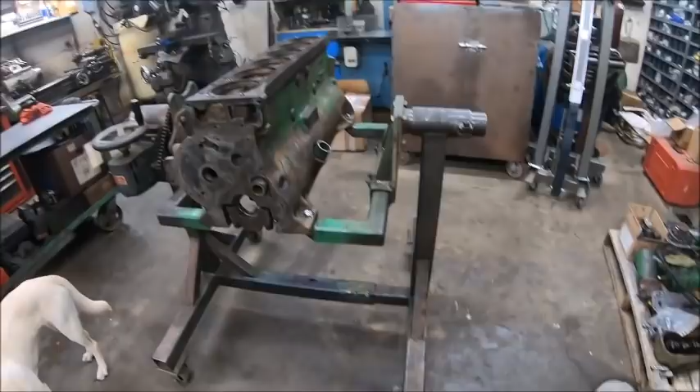Okay, so I spent pretty much all of yesterday cleaning parts and scraping gaskets, and I finished stripping the block down, got the locator studs out of the head deck, scraped all the gaskets off the side of it. I got all the plugs out of the ports except for that guy. I might have to drill that one. He doesn't want to move, or I'm gonna have to get the big torch out. I don't know. I don't really want heat on the block with that, but I gotta get that one out yet.

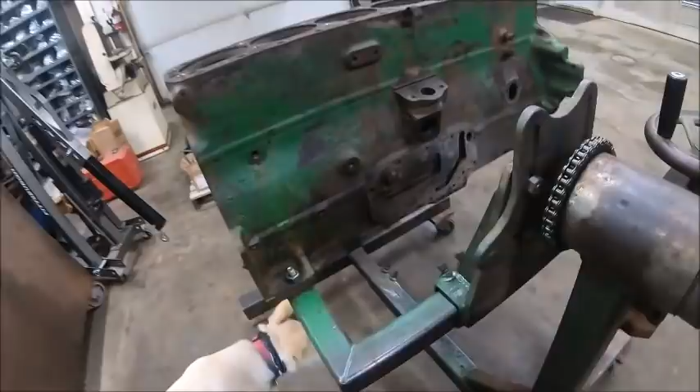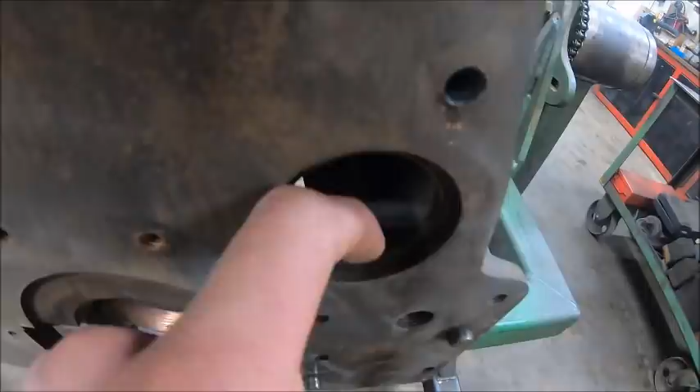But I found all sorts of interesting things. For starters, this back cam bearing has got a step worn in it. You can kind of see it on camera right there. That back cam bearing was definitely shot. And then at the back of the cam bore back here, there's supposed to be a freeze plug to keep the oil trapped inside the cam journal.

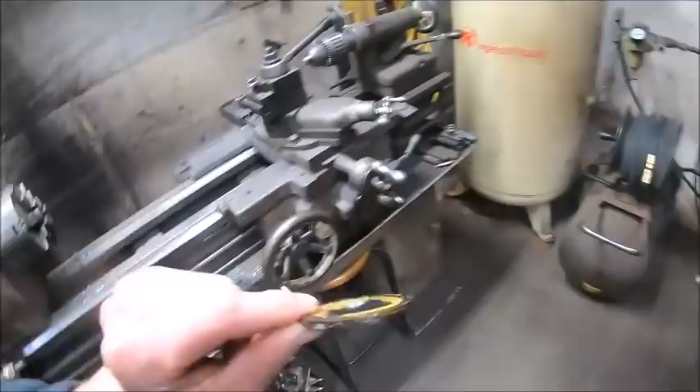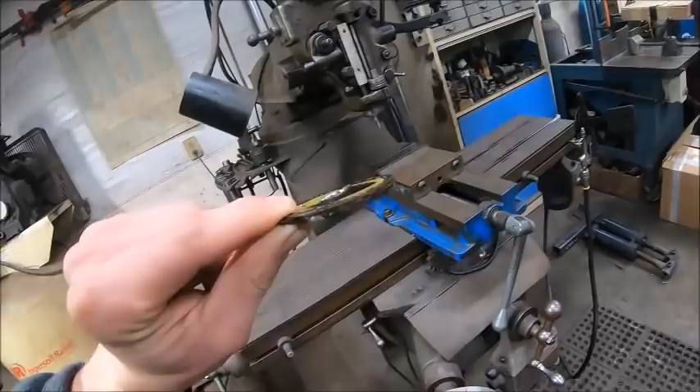And where did I throw it? Right there. Rather than having a freeze plug, they had hole sawed out a brass puck and put it in there and shellacked it in with some sort of gasket sealer. It's older than RTV, but some sort of silicone, and they just stuck it in that hole, so it wasn't even a freeze plug. So that was the first thing I found.

You can't destroy that.

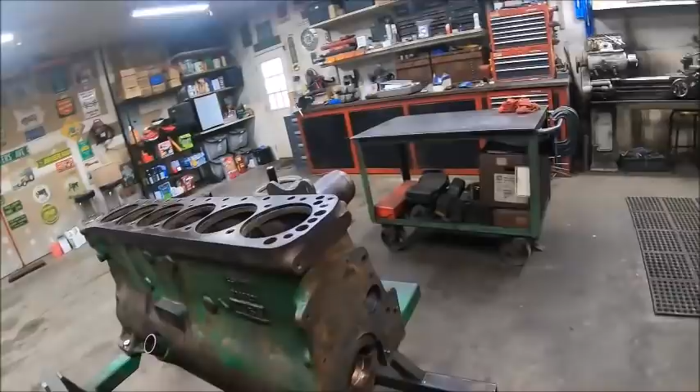The rear main, we are wondering, and we'll never know for sure, but it's a possibility as to why this rear main is shot. There's no babbitt on that rear main whatsoever. There's a little bit right there, but for the most part the rear main's gone.

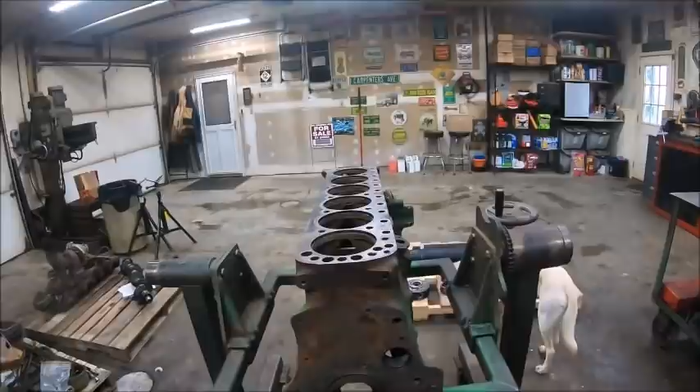Dad and one of his guys were here working on cylinders yesterday, and they were talking before I got here. Good possibility that the reason the main bearings are in such bad shape is because of that shaft being screwed up in the 3-speed and that really bad vibration the driveline would get. If it was bad enough to shake the entire tractor, like rattle you out of the seat shake, Lord only knows what kind of a beating that crankshaft was taking, trying to hold everything together in the bottom end of the motor while that input shaft was doing whatever the hell it wanted to inside that pilot bearing.

So there's a very, very good possibility that's why the main bearings are junk, because of that vibration it had. So there's that. I called Maybaugh today and got bearings lined up. They actually had the bearings I needed on the shelf, go figure, because right now 310 bearings are kind of hard to come by because of supply chain issues.

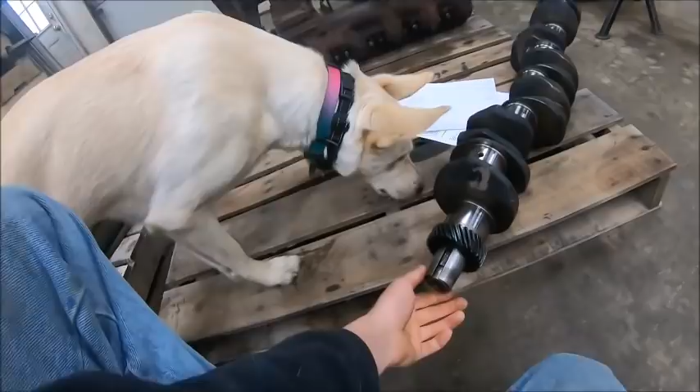But when I took this apart, it had this tapered collar pressed on the end of the crank. There's some weird stuff going on here, ladies and gentlemen. The crank pulley, which is buried over there, had a tapered bore to match this tapered collar. Any Waukesha I've ever worked on, and I talked to him at Maybaugh about it too, they've never seen one like this. Every Waukesha ever is just a straight stub on the end of the crankshaft, and the pulley just presses on. It doesn't have this taper.

And looking at it now, I'm wondering if at some point the crank pulley came loose.

Teeter, get out of the way.

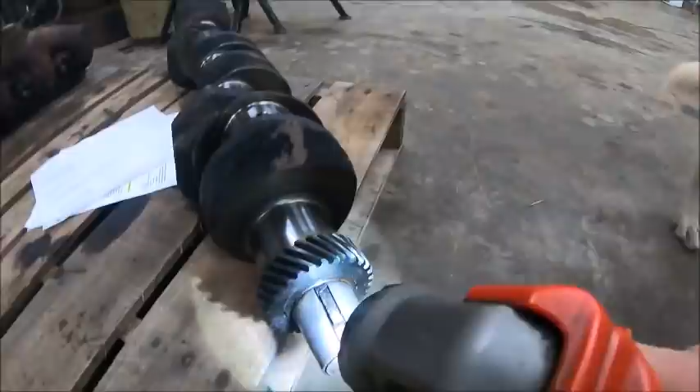And that keyway's ate out. I can see it now that I look at it. That's neat. So this might go back together just the way it is, because if that crank pulley... Huh. I did not see that yesterday when I was looking at it. If that keyway's ate out, the only good way to fix that is to weld it shut and cut a new keyway, and that's not exactly something you want to be doing on a crank. Yeah, that key slot's broke out. That's neat.

So I might be putting it back together with that crank pulley.

I was going to get a different one coming that was just a straight press-on, but with that key slot being roached, I don't necessarily know if I want to screw with it. It was obviously working before and it wasn't leaking any oil, so... huh, well, that's neat.

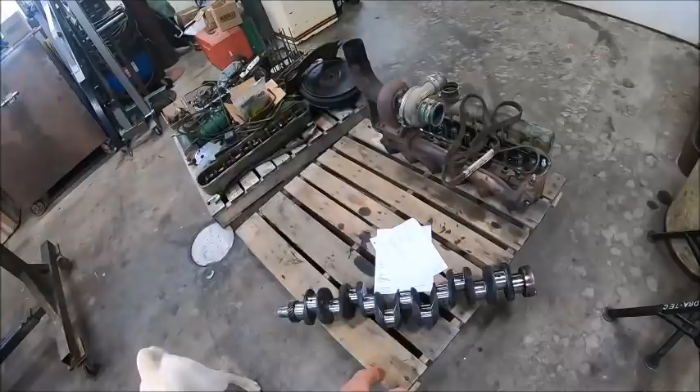But anyway, 310 cranks are not easy to find. We got lucky because you can buy brand new 310 cranks, but they're Chinese, not forged, they're cast, expensive, and they break. So you don't want to buy the brand new ones because they're junk right out of the box. Finding a good used one is hard. And when we found the one from a 1955, we got lucky.

Dad found one on eBay. The only reason we ended up with it was the guy that owned the tractor was going through a divorce, and they were splitting everything up, and she wanted her half of everything. So rather than giving her the tractor, he cut the son of a bitch in half right behind the fuel tank with an abrasive saw.

I shit you not, that is the exact story, because we got it from a salvage yard. That is the exact story the yard owner gave us. This tractor came in a perfect tractor, other than the fact that it was sawed in half right in the middle of the fuel tank - fuel tank, frame, whole thing sawed right in half. So he was parting out the good stuff, and it had a good crank in it.

So we got a good virgin crank out of a 1955. Teeter, what is your damn problem?

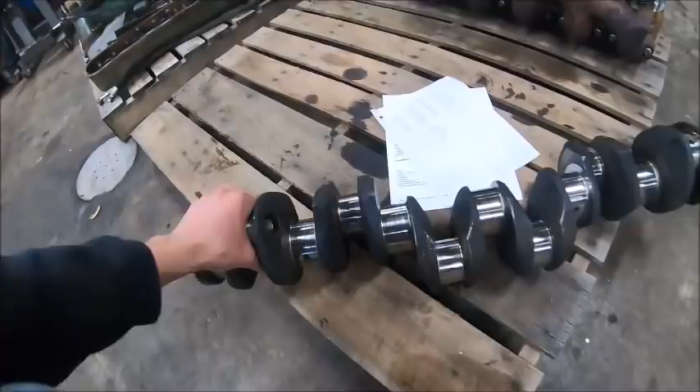So I really don't want to have to replace this crank just because of a keyway. All of the journals, I went through and mic'd everything out yesterday. All the mains are roughly 20 under - they're all measuring about 2 inches 605. Two of them are actually fat, measuring 2 inches 606. So they were actually still oversized for 20 under, because stock grind on the main journals is 2 inches 625, so 20 under would be 2 inches 605. So those number 5 and number 1 were actually still fat.

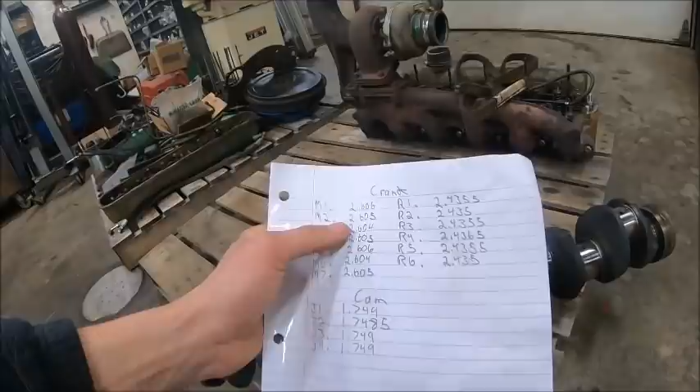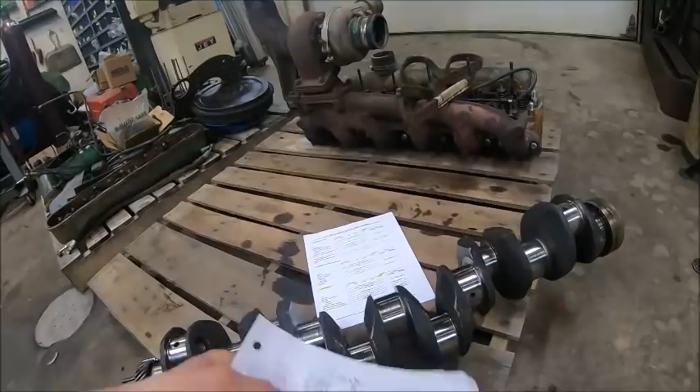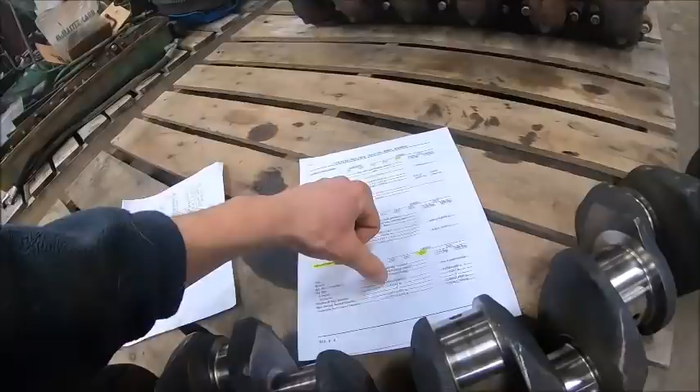And then the rod journals are measuring pretty much stock, roughly 2 inches 435. Wait, that page - 2 inches 436 to 2 inches 435 and a half, to 2 inches 436 and a half. So they're all measuring roughly 2 inches 435 to 2 inches 436.

A 10 under grind on the rod journals would clean them up, and a 30 under grind on the main journals would clean them up. So the crank is within spec to grind.

Like I say, I got the bearings, my name's on them, they're sitting on the shelf. So I didn't get them coming yet because after thinking about all the vibration this thing has gone through because of that screwed up input shaft on the 3-speed, I want to have it magnafluxed to make sure it's not cracked before we put any money into it - grinding it and getting bearings and whatnot.

So we're taking it down to the machine shop today - the same shop that ground the one on my '19. Actually, I think we just had it polished, or did we have it ground? We might have had it ground 10 under on everything. I can't remember. Either way...

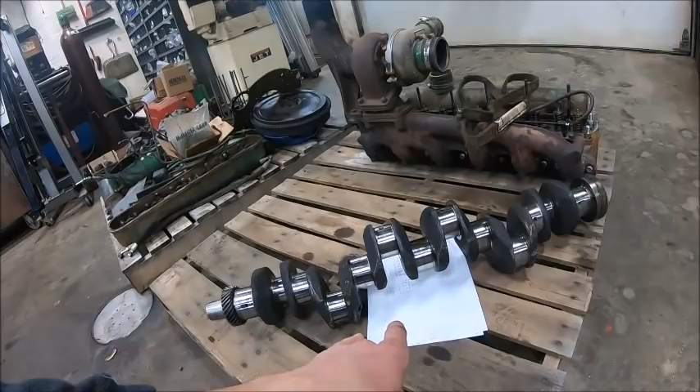They are 3 to 4 weeks out on getting it ground. They're not far behind, but I was hoping I could sweet talk them into getting it magnafluxed right away, so that I at least know I have a good crank. That way I can go ahead and get the bearings coming and all that, and not waste money on getting the bearings here to find out the crank's junk, to find out I got to send the bearings back and get a different set and find a different crank.

That's that. That keyway is really kind of bumming me out, but I don't... they obviously did a decent job of fixing it with that tapered pulley. So I don't know, we'll find out.

The other fun thing I found out was on the rods - they still have the 2-piece wrist pin bushings.

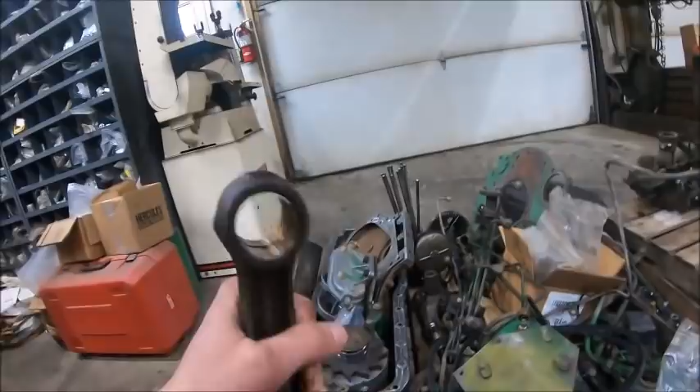And which one? That one. Yeah, right there. I did not push that wrist pin bushing out. It was like that when I took the pistons apart yesterday, and it was already cracking. That thing was only about a quarter inch away from turning this from an overhaul into a Cummins conversion.

Because that's what the 2-piece wrist pin bushings did. They would push out and either lock up the wrist pin, and it would start turning inside the piston and break the snap rings and do all sorts of fun stuff, or it would come out and seize the whole assembly and break rods. 2-piece wrist pin bushings, not good. I don't know what dumbass thought that was a good idea, but it was not.

So I just about shit a brick when I was pulling these apart and found that. It's the only one that was doing it. This is number 5. So maybe this whole ordeal was her way of saying, hey, we better get an overhaul done now, or we're gonna have a lot bigger problems than just blowing head gaskets.

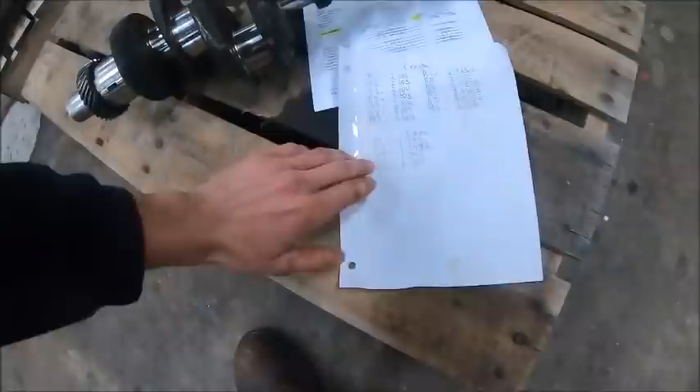So that was all the fun stuff I found. Oh, and I mic'd the cam. Everything on the cam, or all the journals, came out good. Stock grind is 2 inches, 74.95.

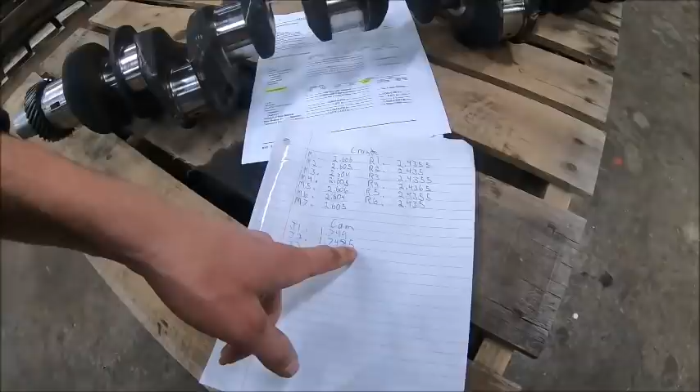All 3 of these journals are 2 inches, 749, except for this one, which is 2 inches, 74.85. It's actually a little fatter than that, but I rounded down. It's not quite 2 inches, 749. Or 1 inch 749, sorry, not 2 inches, 1 inch 749.

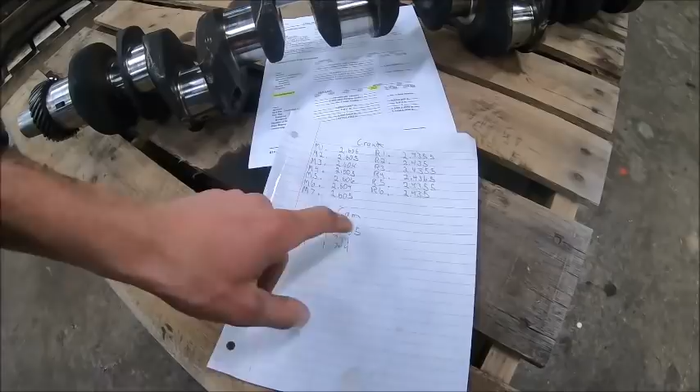So the cam journals mic out within spec. That smaller one is right at the bottom end of spec, but it's still within spec. I've never heard of anybody replacing a cam on one of these. If it was a race engine spinning 7,000 RPM, okay, but it's just an old diesel spinning 2,600 RPM, you're good.

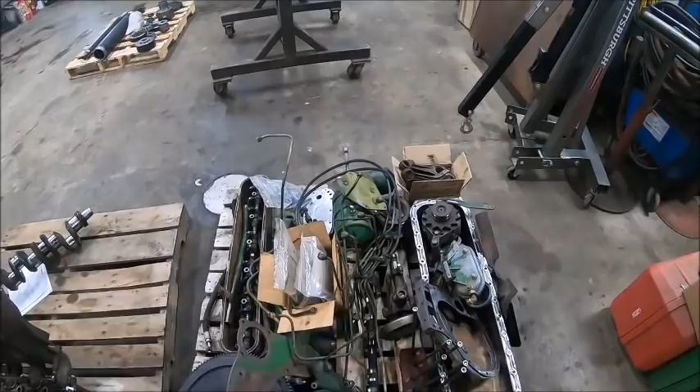Yeah, but really that's all I found that's interesting. All I still got to do is tear the head down so we can take that in to get fluxed, and I want to tear the oil pump apart, clean the inside of it up, and make sure there's nothing out of the ordinary, but it still feels tight. No weird feeling when you roll it over by hand, so it should just be clean it up, inspect it, put it back together, be good to go.

So that's what I'm going to do today, is get the oil pump apart, get the head apart. We'll get everything organized, it's got to go to the machine shop. The crank's going today, and we should be all done with the engine for now in a few hours, and then we start working on the 3-speed, which will be a different video.

Well, I just got a good little bit of news. Dad walked in right after I got done telling you what all we got going on here, and said he got a phone call this morning that we're losing the building out on the highway where we keep all the equipment. So that's neat.

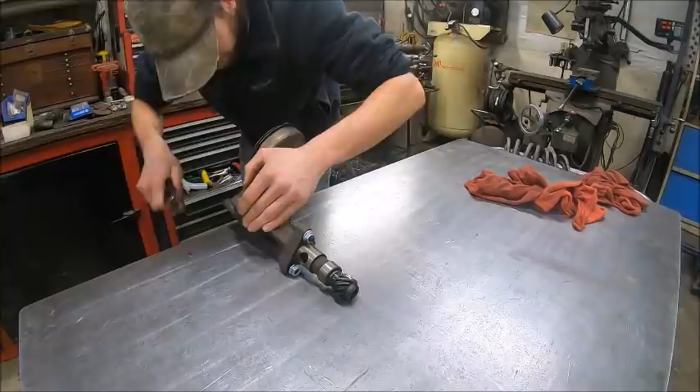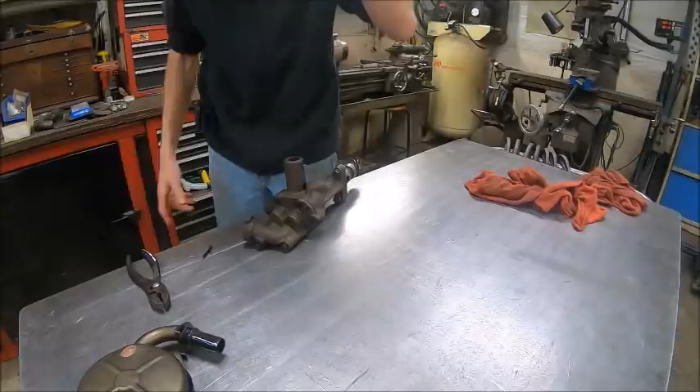So I just spent the last hour on the phone calling pole barn builders around here, getting numbers. Naturally, none of them answered their phone. I don't know if they're off for the holidays. Most of them are Amish, so they're hard to get a hold of to begin with. But that's how my morning went.

So it looks like I'm putting up a barn sooner rather than later, because we can't have all that stuff sitting outside. She can stay outside. She's been getting antsy.

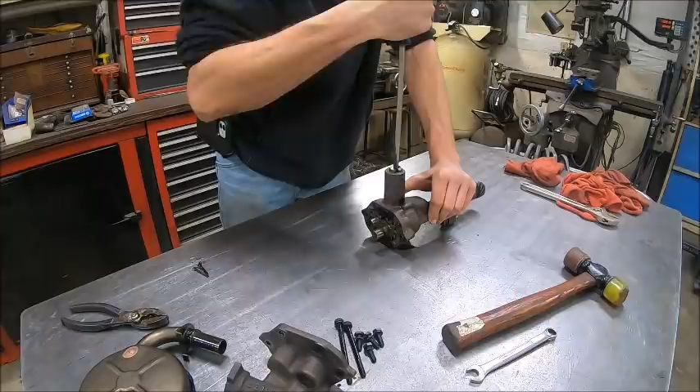Okay, I'm going to put this in the vise right quick. Alright. So that's 1, 2, 3, 4, 5, 6, 7, 8, 9. 9 turns. 9.5.

And then you gotta get your relief poppet out.

Which is always a good time. There it went.

We got to drive this roll pin out so that we can get this gear off, and then the shaft drops out the bottom. And then once you got the drive sprocket off, your main driver comes out. And then your idler comes out. And that's basically all there is.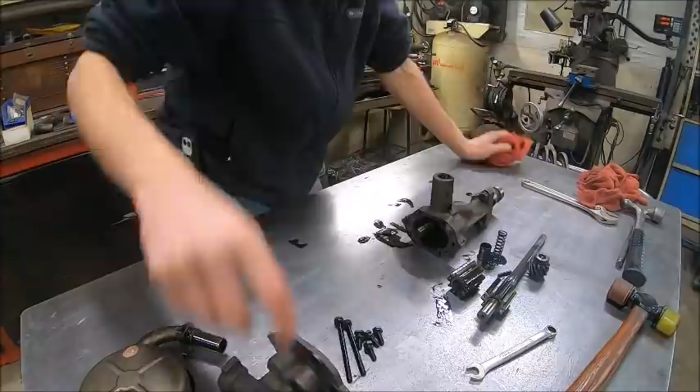Pretty simple oil pump. There's a bushing here, a bushing there, and the idler's not bushed, and the bottom is not bushed. But it shouldn't really have to be. It's constantly running in oil, and it's not a high pressure pump, so it doesn't see a lot of side draft from the pump case being pressurized.

I'm going to clean these parts up in the solvent tank, and then I'll bring the book up and we'll get the mics out, because I think the book gives you some dimensions to measure the shaft and everything to make sure it's all still in spec. And we'll visually inspect it, make sure there's nothing wrong. I don't see anything wrong.

It was a clean, other than having water in the oil, the crankcase was clean, other than some sludge from water being in the oil. So it's not like the pump ate anything foreign. And it held good oil pressure somehow. The way those bearings were, it should have never held the oil pressure it did. But there's no reason to believe there's anything major wrong with the pump. So I'm gonna get this stuff cleaned up and we'll go from there.

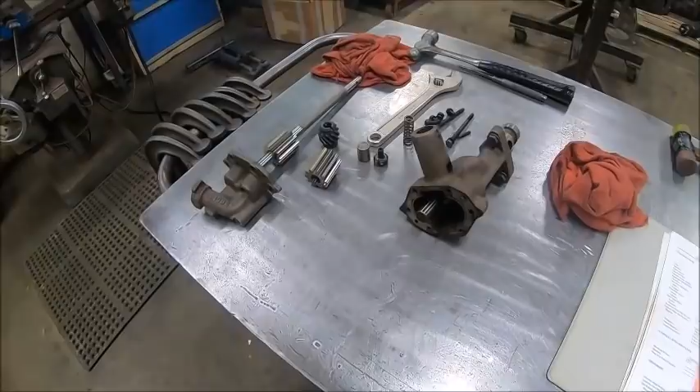Okay, so it looks like we're gonna be getting some pump parts. They don't give you actual dimensions as far as like measure the shaft, it's going to be this dimension, measure the bushings, it's going to be this dimension. They give you running clearances. So you got to measure the shaft and the bushing and subtract one from the other to get your running clearance.

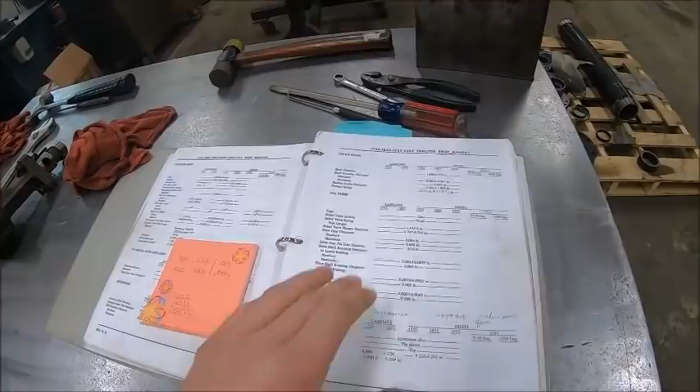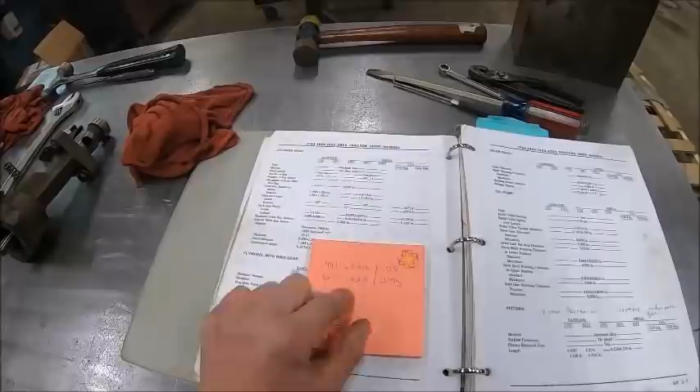So the upper end of the shaft measures 491, the lower end measures 623. And then the bushing, the upper end measures 522, the lower bushing measures 628. So you subtract 491 from 522, gives you your running clearance of 031. And same thing down here, and you get a running clearance of 005, or a half a thou.

You take that and you go over here to shaft running clearance and lower bushing. Maximum is a half a thou, so we are right on the edge with the lower bushing. And upper bushing, the maximum is a half a thou, and we are at over 3 thou. So the bushings are shot.

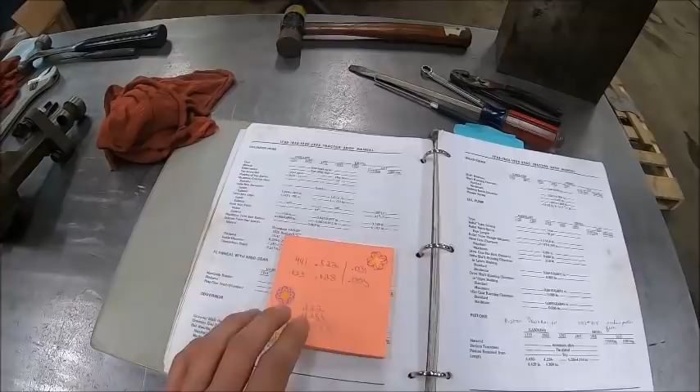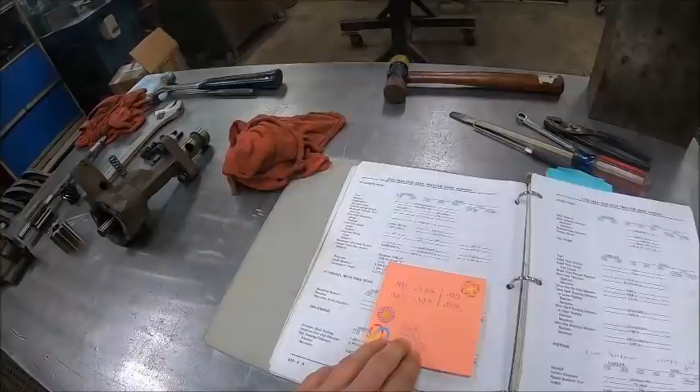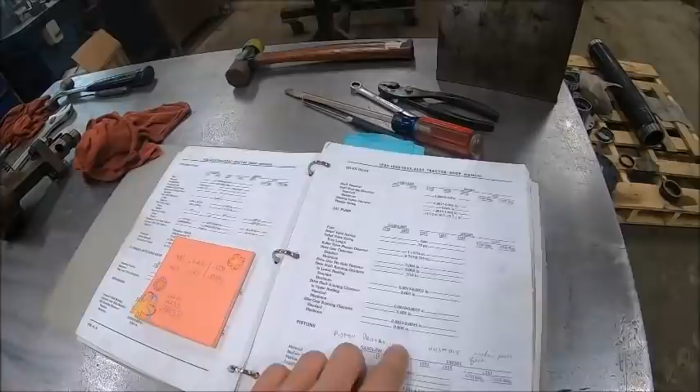And then on the idler gear, this guy that rides on this shaft, the shaft measures 622 and the bore of the idler measures 6255. So you subtract those two and you get 0035, which is basically minimum standard. So this is still basically at factory spec new tolerance. That's fine, and the idler shaft is fine, so we're good there.

And then they also give you a free length dimension for the spring, which is 1 15/16 inch, which is 1.9375, and this measures basically 1.905. So that spring is partially collapsed. So we're gonna have to get a spring.

We're gonna have to get a lower bushing and an upper bushing, because if we're gonna do the upper bushing, you might as well do them both. And then I think I'm gonna end up seeing about a shaft, because I don't know if you can hear it. The shaft is worn.

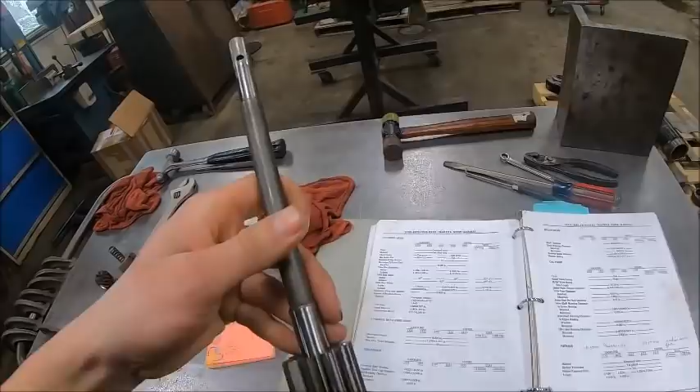But the rest of the pump checks out good. So everything else is kosher. It's just the shaft and both bushings and the spring.

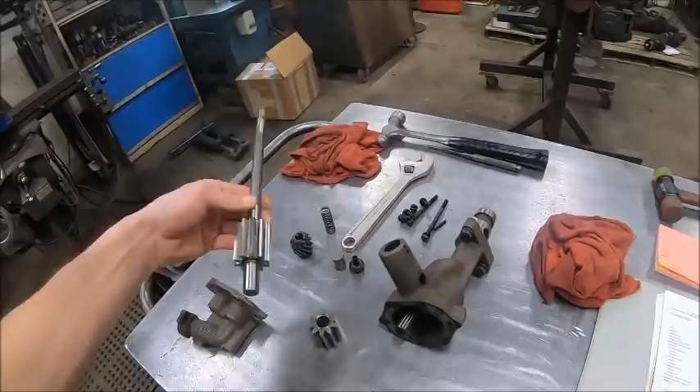Obviously can't put that back together, and I looked and they didn't send the gasket to put the pump back together neither, so even if I wanted to, I couldn't put it all the way back together. So the pump's going to go in a bag, and I'm going to add that stuff to the list.

And that part's done. All right, I got the head up here on the bench. I'm probably going to wait till the morning to tear this down. This whole day's just kind of gone to shit.

Not been a good day since I walked through the door this morning. We did get the crank run in. We took the gear off the end of it, and the key. If I can get the key out of the box. Come here. Come here, you dirty bastard. That's what's left of the Woodruff key.

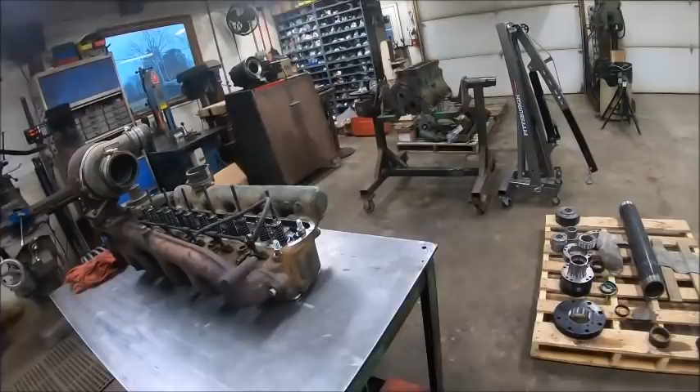So there's good news and bad news with it. The good news is the damage to the keyway is not nearly as bad as it initially looked. The part that was broke out is maybe not quite a ½ inch long. Probably like 5/16 long, just a little right out of the very front corner of one side of the key slot. And it's a Woodruff key, so it's a nice deep slot, and the key was still very well seated down in the slot.

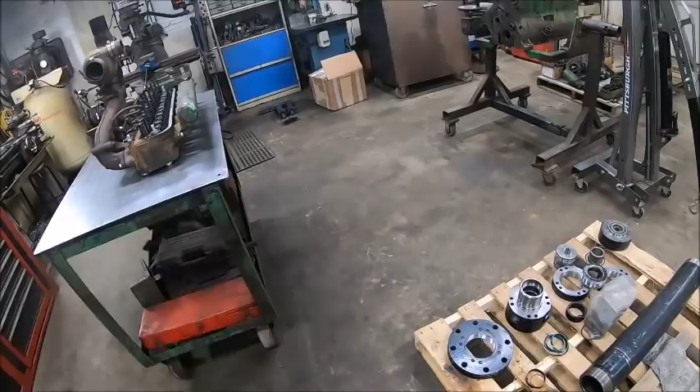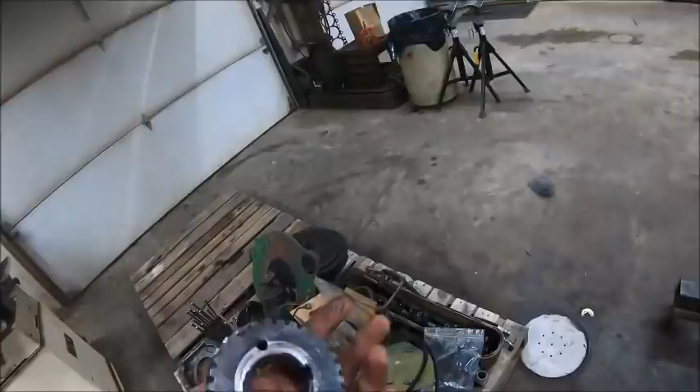The slot's still on location. Everything past that point on one side and everything behind it is still all in good shape, so the key slot is still a viable key slot, and the part that broke out has nothing to do. Everything important is back inside of this gear, and this gear is press fit onto the end of the crank. So once that's on there, that key cannot roll.

It's kind of a wonder. It would appear that at some point that crank pulley had come loose, because the end of the crankshaft outboard of that sprocket, because that sprocket protected the part of the crank journal that it was pressed onto, so everything that's still press fit, that's still on location. Everything with the timing gear is kosher. We're good there. But everything outboard of that was a little boogered up.

It's about, oh, what did Dad say? About 5 thou undersize, I think, because Dad mic'd the crank. But it's at least still fairly true. So the way that crank pulley wore it, it's narrow. It's got a fat spot in the center, and then it's narrow again. So it's like the pulley was on the crank doing this.

So I've got the crank out right now. I wasn't able to actually talk to the machinist. I talked to the counter guy. I'm probably going to call down to the machine shop tomorrow and explain the situation, and just make sure that we weren't playing a telephone game and shit got lost in translation, and I can actually talk to the guy.

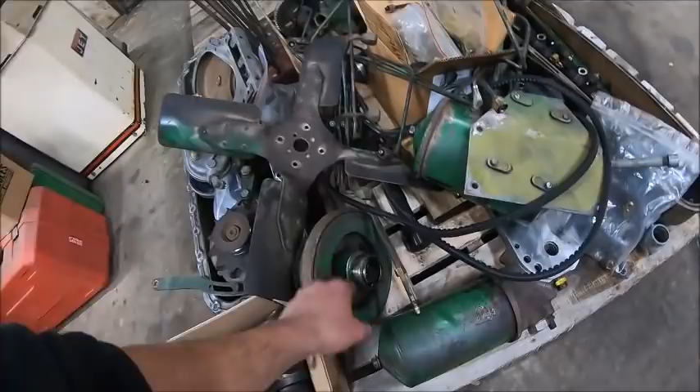I called Mayball this morning to get them started working on finding me bearing sets. Ironically, they had both sets I needed on the shelf. But I talked to the mechanic while I was on the phone with him, and neither he nor I can find anything in any of the parts books about that taper lock crank pulley like that.

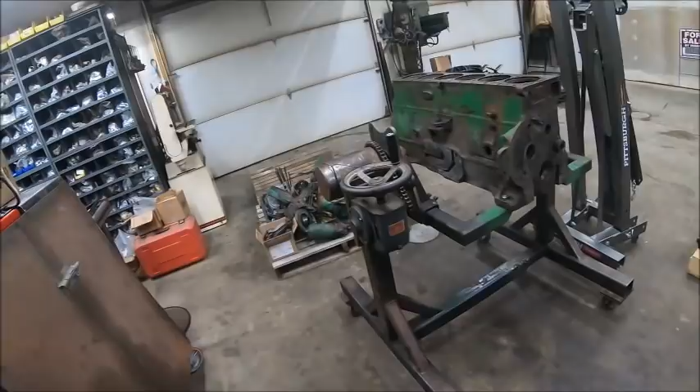So if I can get the right crank pulley for it, as long as you torque that nut down to spec like it's supposed to be, everything is held in tension. So by all rights, the crank is still true enough that the pulley should be on the center of the crank. Everything should still be okay if we can't get it spray welded and built back up. It would just be nice to get it spray welded and built back up so that it's back in spec and everything fits like it's supposed to. But before we get too gung-ho about that, need to find out if the crank's even worth a shit and it's not cracked.

Hopefully it's not. Otherwise, we're going to go down a whole rabbit hole that I do not want to have to go down. I don't know how we keep getting these. I don't know how we keep getting the good ones. We're going down the exact same road that my 1955 was in, where some guy had been in there working on it that should have never been working on it, and literally everything we touch is fucked up in some way, shape, or form. So, I swear to God, not all 310s are like this. We just somehow managed to pick the good ones. I don't know.

So, anyway, taking that crank down, I just rode with Dad. Dad had to run some errands, so that burned up 2-3 hours of the day, and I've been worried as hell about this barn situation. I finally just got my first phone call back from a builder. They're about like everybody else in any sort of trade right now. They are swamped with work.

So how I wanted this whole thing to play out was I wanted to wait till about middle of next summer after we got through wheat and things are starting to calm down, and I wanted to save money and put it up myself. Well, now we're losing that barn out on the highway, which we didn't own. We basically have been using that barn in exchange for taking care of the property.

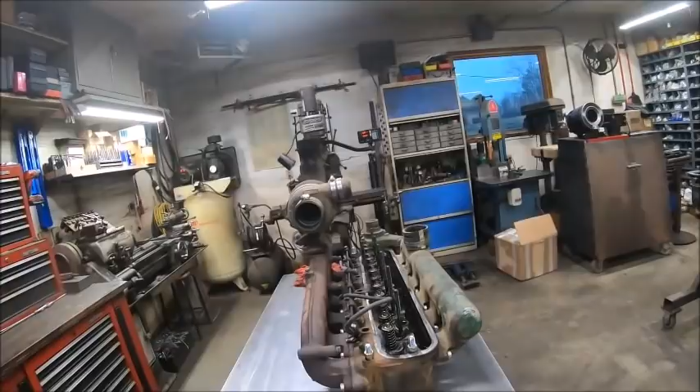Probably since right after we got my 66, because it's before we had any of the big equipment. I was probably like 9 or 10, so at least 18 years we've been using that barn. And we always knew he was going to sell it when the time came. And we were hoping it would work out where either Dad or I could buy it. Well, the way things are looking for next year, neither Dad or I can afford it right now.

In all reality, he's not asking too much money for it. And if there was more tillable ground there, I would jump on it in a heartbeat. But that red barn we use is basically 4 walls and a roof. And whoever built it did a shit job. They didn't trim the roof out. It's not built square. The whole building is racked like a foot corner to corner. I mean, that red barn, other than the fact that it was cheap storage, is shit.

The gray pole barn that's there is actually a nice barn, but it's only basically a 2-bay garage, so it's not much storage. And then there's only 2 acres tillable. So, with the outlook for next year, I can't swing that kind of money anyway, even if I wanted to. So I'm stuck with putting up this barn, and it has not been a good day, I tell you what. We started off decent, and then an hour into it, everything went to shit.

Now I'm worried about that. Like a month ago when I chisel plowed it, everything was fine. He wanted me to just leave him a trail so he can get back to his woods, because he wanted to cut a trail through his woods for deer hunting and whatnot. And then here we are a few weeks later, and boom, he's selling it. I wish I'd have known this 2 months ago, because I would have never tore into this project.

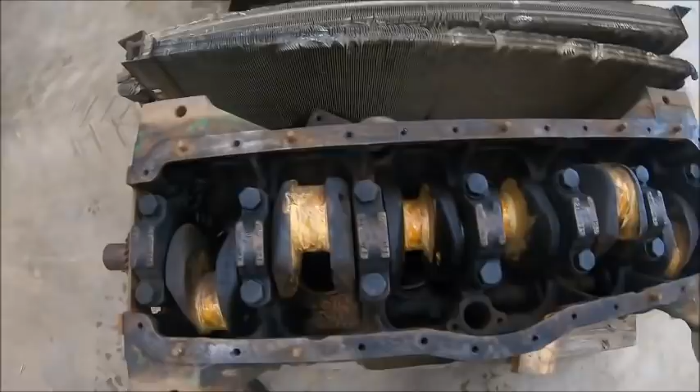Okay, here we are. They had this thing bolted over the bottom of the crankcase. This is the first time I've actually ever had it off to look in here and see what we got. This thing definitely has a very, very broke camshaft. But they must have deemed the crank good, because somebody took the time to actually wrap it in tape and put, yeah, what's the stuff called that they used to put on machine parts for shipping?

Name's slipping me now. But it's been coated so that it doesn't rust, so the journals don't rust up. So somebody must have deemed it a good crank. And I couldn't find the part number on it, but I found the casting number, and I called Maybaugh, and that casting number 221411 comes up as a 310 diesel crank.

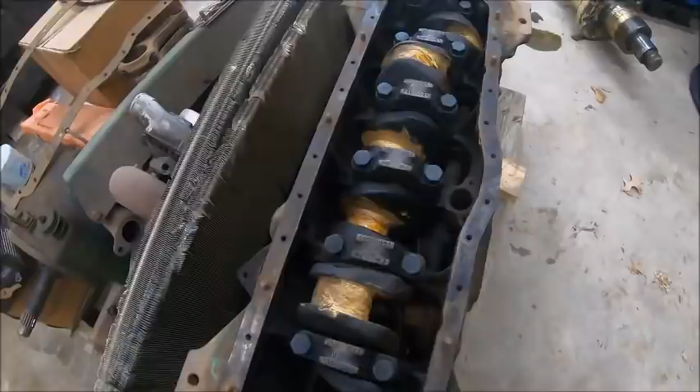So I am going to get this thing out of the block, and we'll take it up to the shop and clean it up and mic it and see where the journals are at. And if this crank mics out better than the one I took in, we're going to take this one down, bring mine back, and get this one ground. I'm guessing just by what I see that this crank is probably going to be in better shape.

So I can actually already tell you it's in better shape because, first off, the key slot's not broke, and second off, the end of the shaft isn't all whopped up. So things might be looking up. I completely forgot we had this thing. This is working out pretty handy.

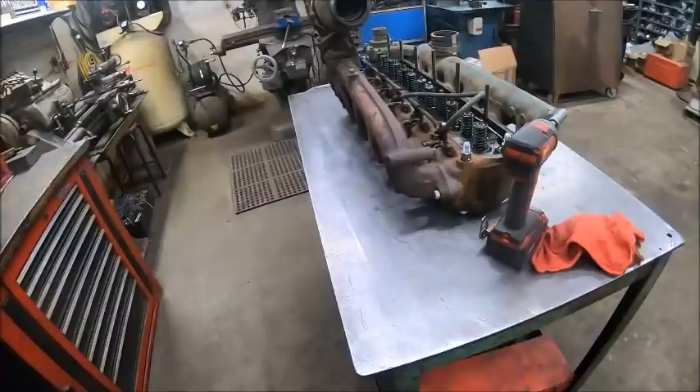All right, so that other crank, that thing was beautiful. It was a completely standard virgin crank, never been ground. To be completely honest, you damn near could have got away with throwing standard bearings in it and running it. Dad actually just took it down to the machine shop to swap it out with

the original crank. The only reason I didn't was the number 7 main journal up against the flywheel had some rust pitting in it. Apparently when it was sitting in the block, it must have got some condensation in the lower bearing shell, and about half the crank had a little bit. It wasn't bad, you could barely feel it, but you could see it. So it's going to have a 10 under grind on everything.

I had one rod journal that was slightly undersized, and for some reason it had 2 rod journals that were fat. I don't know, because 2.4365 inches is the, was that the lower end? Just let me get to the page here. Where's the page? There's the page.

On the rods, yeah, 2.4365 inches is the lower end, and 2.437. Okay, so never mind, it didn't have 2 that were fat. I was thinking of the bottom end. So those 2 were top end. That one was in the middle, but this guy right here was a half a thou under. So that number 2 rod journal meant that the rest of them had to get ground.

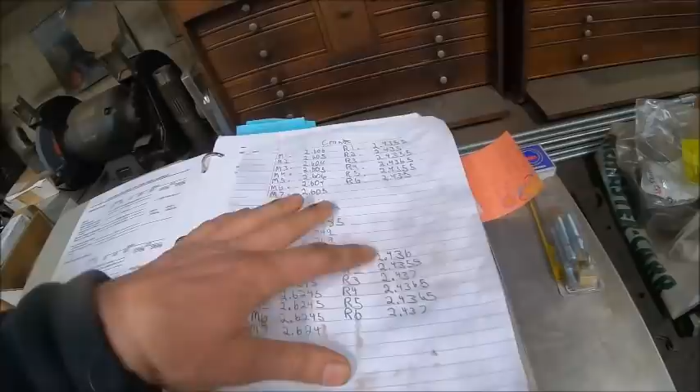I mean, there was a time when guys would see something like that, they would grind the one rod journal 10 under, throw a single 10 under bearing in it, and put the rest back to standard. I'm having all the journals ground 10 under, so that all the rods match.

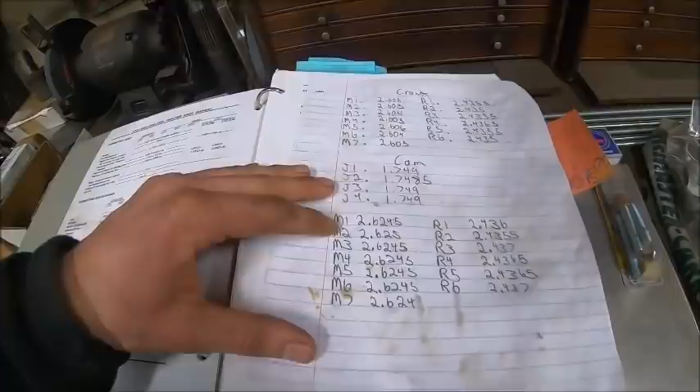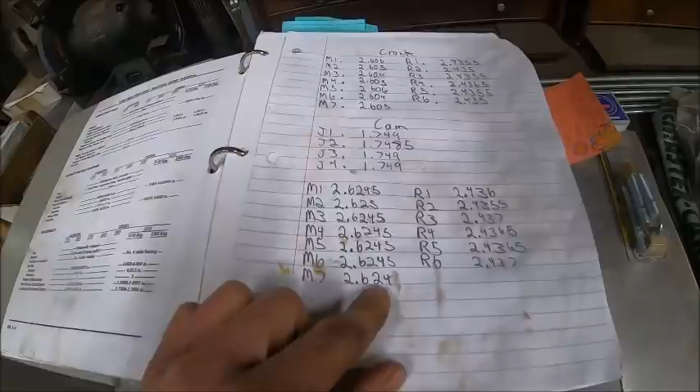And then all of the main journals, that one right there is right dead nuts on factory tolerance, 2.625 inches. The rest of them were all a half a thou under, and number 7 was at the bottom end. 2.624 inches is the bottom end of factory tolerance for a standard main bearing journal, which would stand to reason that that's the one with the most wear, because that's the one that supports the flywheel, so that makes sense.

And main number 7 had that rust pitting in it, so a 10 under grind should take care of it. But if it wasn't for that rust pitting, you could run your finger across the journals, they were smooth as a baby's ass. I mean, that crank was immaculate, other than that rust pitting in number 7. So a 10 under straight grind across all the journals should take care of it.

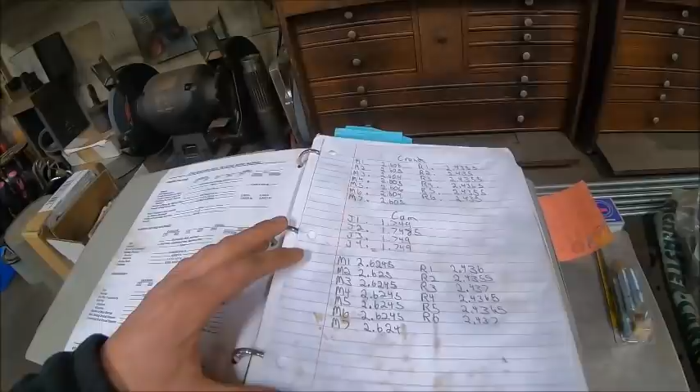The end of the crank was beautiful where the key goes. There was just a teeny tiny bit of a seal groove in the flywheel end of the crankshaft, so we'll still probably get a seal with a repair sleeve on it, but all in all, that crank is 10 times better than the one that came out of it. So I'm not going to scrap the old crank. I think it's very easily savable.

And here I just got done saying not too long ago that 310 cranks are hard to come by, and I had one sitting down in the barn that I forgot about. That was lucky. But my plan for the crank that came out of this, because everything that's wrong with it is fixable, I'm just going to take it down and throw it on the shelf. I might just throw it back in that block so it's protected.

But I'm going to save it for now, and then maybe next summer or next fall when I got some money laying around, hopefully, we will get the end of the crank spray welded so that we can grind the journal down where you press the timing gear and the crank pulley on, get all that turned back up to size and running true so that it'll actually seal right, and then grind all of the main and rod journals to size so that we got a completely fresh crank, and set it on the shelf and keep it around for a spare. So that's where we're at there.

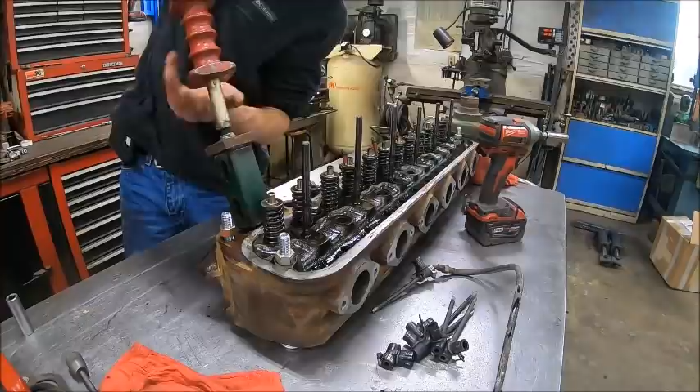My special tool. I made this thing a long time ago for popping Stanadyne injectors. You can buy the right tool for them, but I needed something right now, and this worked right now. Can't remember what tractor I made this for.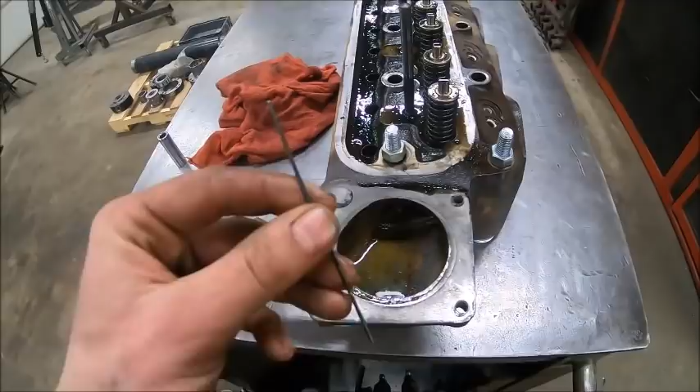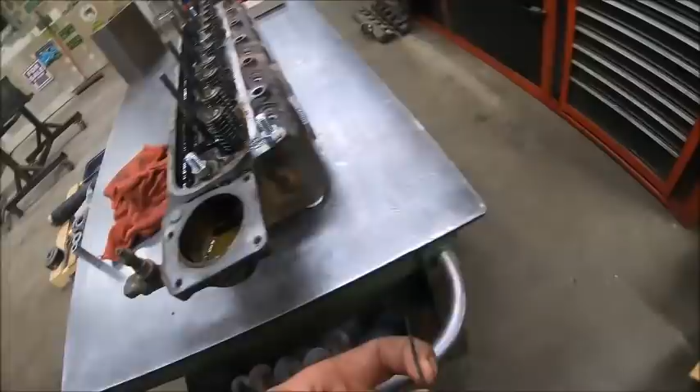So this is interesting. I took the thermostat off to get it out of the way, and this little piece of wire was wedged in there. I tried to stick it back in because I touched it and it fell out, so I could show you guys, but it was wedged in there about like that. No, it's not part of the thermostat. It's not rusty, so it's not like it's been in there. Well, I don't know where the hell or how the hell that would have got in there. I'm confused. I wonder if that was... Huh.

Lord only knows, I'm at a loss for words as to where the hell that came from. Huh, the things you find. The weird part is I've had this head off before, down to bare casting. It would have had to come out of the head, because it couldn't have made its way from the radiator through the thermostat.

Okay, so the last thing we got to do is get the valves out. The only important thing to worry about is these heads don't use rotators on any of the exhaust valves. All the spring keepers are the same, all the springs are identical. On some heads the exhaust and intake springs are different, but on these springs, keepers, and retainers are all identical. The only thing is the intake and exhaust valves are different, and they're lapped to their specific holes, so when you pull the valves out you got to make sure they're organized so they go back into the same cylinder they came out of.

They actually make a special fancy tray for doing this, with slots to lay all your valves and springs in. It's about yay big, and normally they go up to 8-cylinder. But around here at Broke-Ass Acre Farms, we don't do that. We just drill some holes in some pieces of white pine and number everything. So I got 1, 2, 3, 4, 5, 6 for 6 cylinders, and holes for the valve stems. So we're going to start here at number 6.

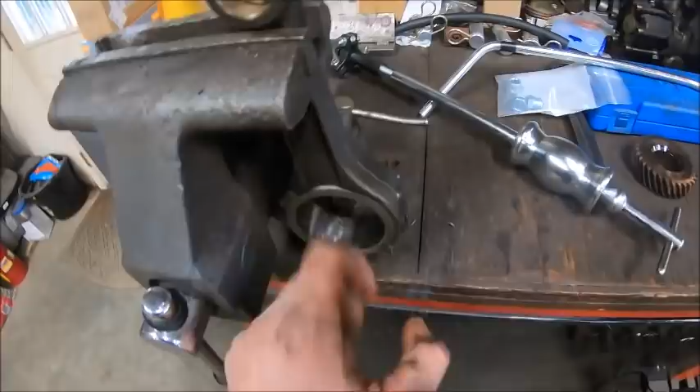Okay, so I'm getting the rods ready. Got to get the wrist pin bushings out, I already took the bearing inserts out. This is that bushing that had walked part way out of the rod already, and when I got it out a chunk fell out of it.

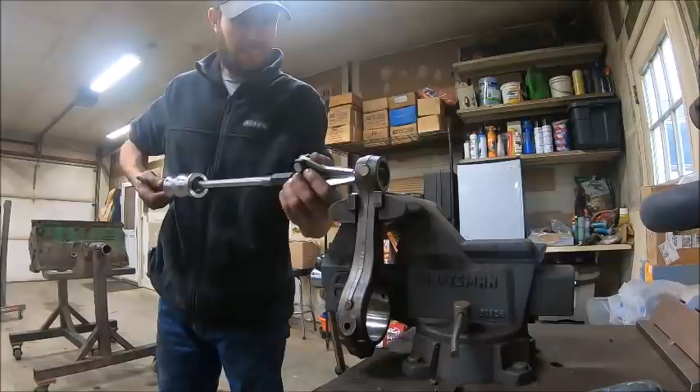Probably weird for somebody to be saying, but I'm really glad this motor decided to let loose like it did, because if it hadn't, whatever is causing the head gasket to pressurize the cooling system, if that hadn't happened, we'd be in a very, very different situation right now. Most likely with a windowed block.

Man, why aren't you coming?

But you can't push the bushings through because they already started to walk out of all the rods a little bit, and now they're all mushroomed over the end of the rods. So they got to come out like this, but you got to get them out in such a way that you don't mess up the bore. I don't know if you can see on camera how messed up that bushing is. The one-piece wrist pin bushings don't do that.

Well, there we go, that should be everything that's got to go to the machine shop. Got the block, got the head, got the rods, and have the pistons, sleeves, rings, all that fancy stuff. Cam bearings are in there. This is what the one-piece wrist pin bushings look like, one piece like they should be. So he has the sleeves in there so he can test fit them when he redoes the counter bore.

The only thing he'll need is the crank when it comes back from the grind shop, and probably the bearings. The machinist at the shop wasn't 100% sure he'd be able to clean the main journals up in a 10 under grind - he thought he might have to go 20. So I'm probably not going to order bearings until the crank gets ground.

Basically he'd need to finish balancing the rotating assembly - the crank and the rod bearings mostly. The main bearings aren't part of the rotating assembly because they don't rotate. When they balance it, they dynamically balance the crank, spinning it up to find the heavy and light spots. Then for the rods, they weigh the bearings out since there's no spot on a bearing to grind to balance it. But basically they go through and make sure all the rods weigh the same, all the bearings weigh the same, all the pistons weigh the same.

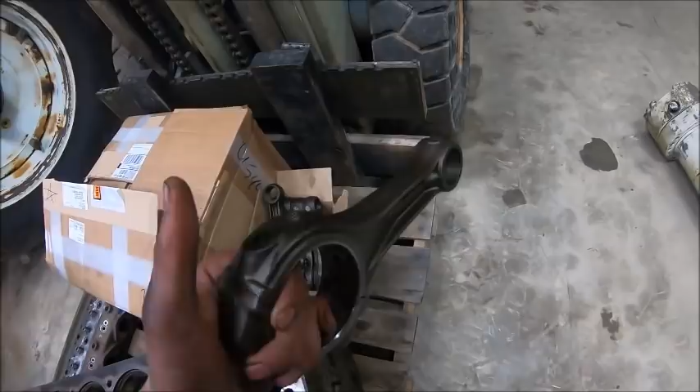If you've got two rods where one's heavier than the other, you make the heavy one match the light one. So you usually come down here on the bottom somewhere and grind a little bit off until you get all your rods to weigh the same, or as close as possible. Sometimes, especially on these older engines that don't spin that fast, it's almost impossible to get all the rods to weigh the same.

Like when we did the motor in my 1955, the rods were so hard that he was getting to the point where he was scared to take any more off to balance them out. So he put the rods and pistons together as an assembly and made each rod-piston assembly weigh the same. I had to put a certain rod with a certain piston, and he numbered the pistons so I could put everything together the way he balanced it. So sometimes it's not always that simple, especially on these older engines.

So that's what we got going on there.

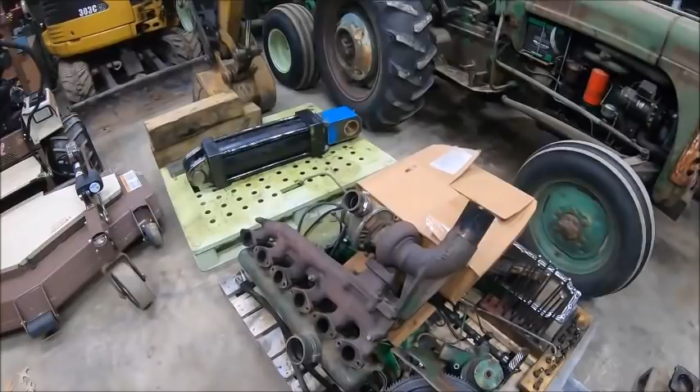Tomorrow I'll start working on a 3-speed, but before that I'm probably going to pull Dad's truck out and get this pallet over with the chassis out of the way, so it's not getting moved around or stuff lost and tripped over. Then I'm going to put the crank back in that block up there, because if it's in that block it'll be safe.

When I do that, I'll make sure to get the number off the tag on that Garrett turbo for the guys that were interested, because that'll be easier than pulling the side panel off the 1955 - it's kind of hard to see in there the way they've got the tag oriented. So it'd be easier to do it on a turbo that's not on a tractor.

That's where we're at. That'll be going in Monday, and the pump will be going out next Friday. I'll have time to run it down. I use - they used to be Majera Diesel Injection, and now they're USA Diesel Group or something like that, down in Crown Point, Indiana. They did my 1955 pump. That's the only pump we've had them do, but they did such a good job we've recommended them to everybody around here. I bet since they did our pump, they've done at least a dozen other pumps that we've recommended people to.

And there hasn't been a single issue, including pumps that other diesel shops said they couldn't fix or had messed up. So that's why we take the time to drive clear down there - because they're a class act shop. That's where we're at there.